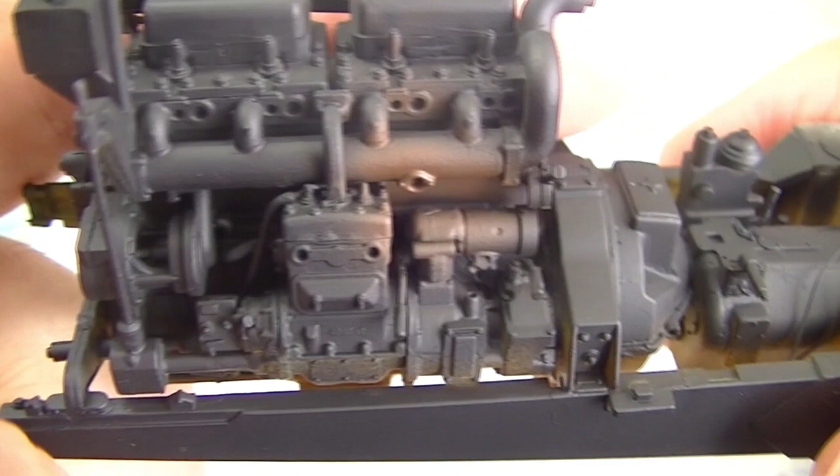So I've done that. I've also added a little bit of wiring. It's tough to see, but if you look down in there underneath the starter, you should be able to see I've got a couple of leads going to the starter motor.

I have also added the ignition conduit. You can see for the pony motor, it's angling down in front of the pony motor cylinder. That's just a piece of lead wire that I shaped there.

And then I also have a couple of spark plug wires coming out of it, but because they're routed around on the back side of the cooling pipe that goes into the top of the pony motor's cylinder head, and kind of underneath the intake manifold there, you can just barely see those ignition wires.

I don't even know how I'm going to get paint on them when it comes time to make them black, but whatever, it is what it is. I'm kind of disappointed at how little they show, but it's one of those things I had to do, so we'll see.

I've got a little bit of rust-colored paint here on the intake manifold because that's where the exhaust from the pony motor runs into it, and I'm going to want to scrub some of the yellow paint off around that. I thought it would be easier to go ahead and put a little bit of the rust on there since I had it out and was doing things with it.

Like spraying the aforementioned exhaust manifold from the pony motor. What I'm going to do is put it on there before I start spraying the rest of the paint on the engine, and I'm going to just use some liquid mask to cover up that rusty part because this is kind of a weird little deal.

This is one casting on the real thing that's got the intake and the exhaust in one chunk. So that part that sticks straight up right there will end up being yellow, while all the rest of it down at the bottom is the exhaust portion and it'll be rusty. Kind of a weird deal, but I think it'll turn out all right.

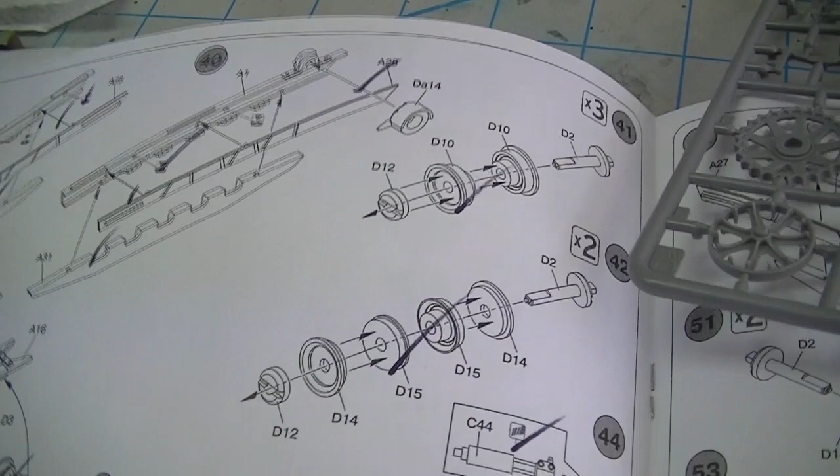And then the next thing you do is assemble all of these roller wheels. Those are kind of a hassle, and they don't really tell you anything other than just put them together. So you're left to assume that you should just glue it all up. That, I think, may be a bad strategy, and I'll explain why here in a second.

Because when you have to combine those trusses from that step and these wheels from that step right here into one structure, that's where the problem starts.

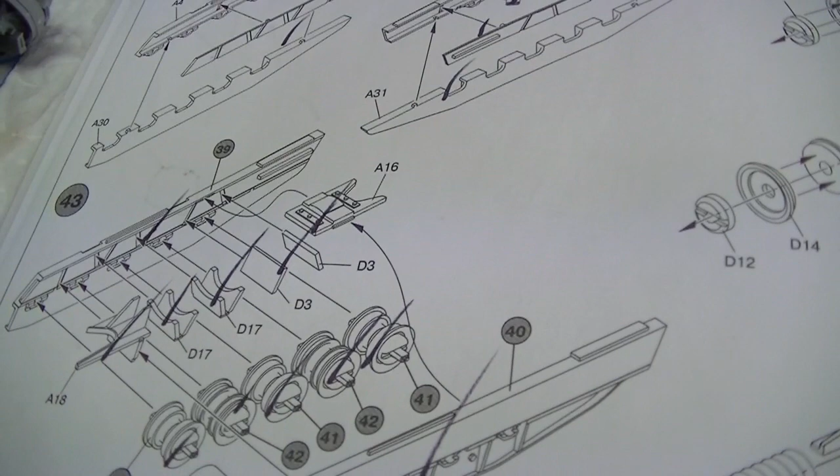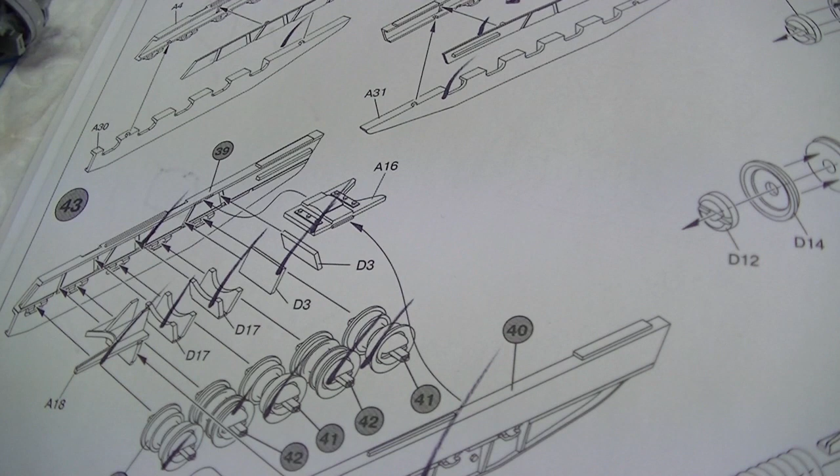Okay, so the first thing they want you to do is take these cross members and add them to all of these slots that are on one side of the assembly. Now let me show you what those slots actually look like.

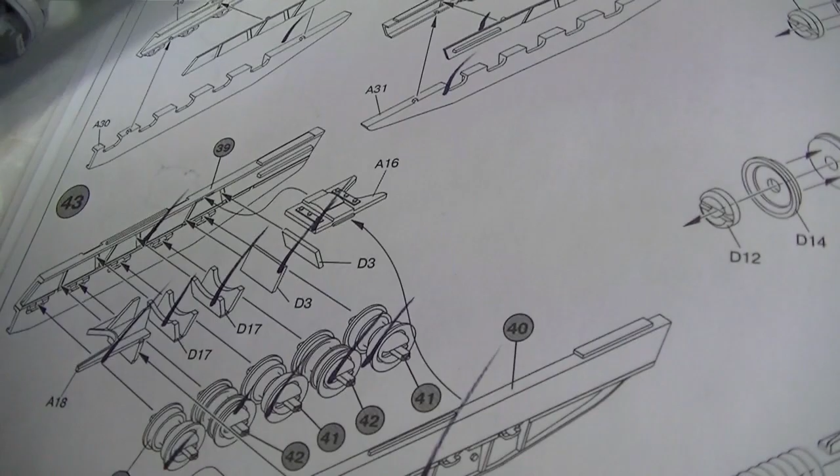If I can find them here on the sprue. Okay, here's a good example. Hopefully I can get the camera to focus right there. Oh, wrong piece, sorry, there they are. Okay, those are the slots, and you can see that they are pretty shallow.

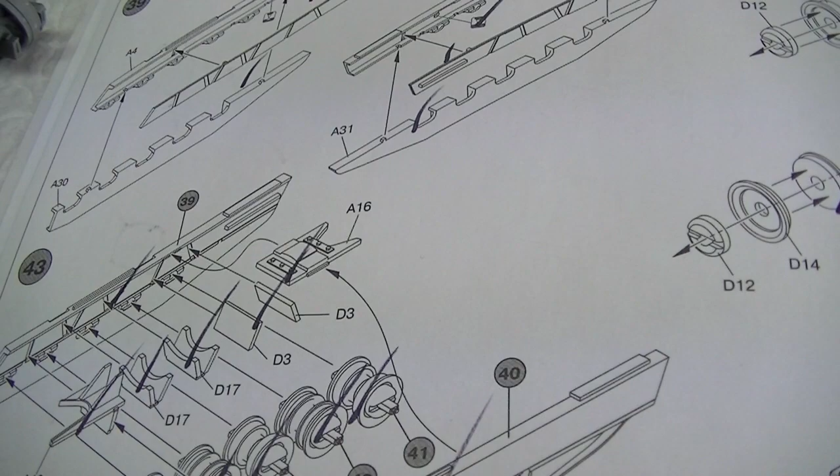Now, if you look closely, you'll see that right here you've got to assemble 3 pieces into a kind of 3-sided box section that mates with these 2 slots over here. These are already built for you, and you're supposed to be able to just glue them in, and they go in pretty effectively.

This is bad engineering. The location features you get here, these little slots, are really not very deep, as you'll find when you go to try and assemble this, especially when you start trying to build this little chunk right here. There's nothing there that really supports those and holds them in the correct alignment.

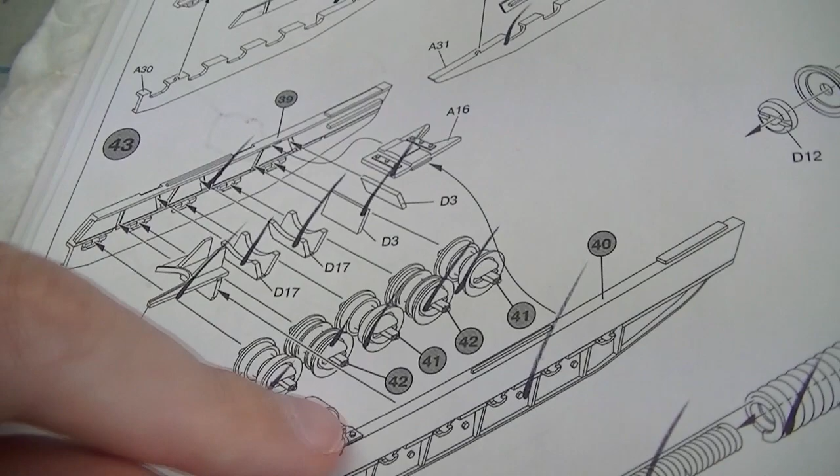And that becomes a problem when you try to join with the other side, because, as you've probably already surmised, there are equivalent slots over here that these are supposed to match up with. Getting everything lined up between the left and the right is dependent on how well you do that.

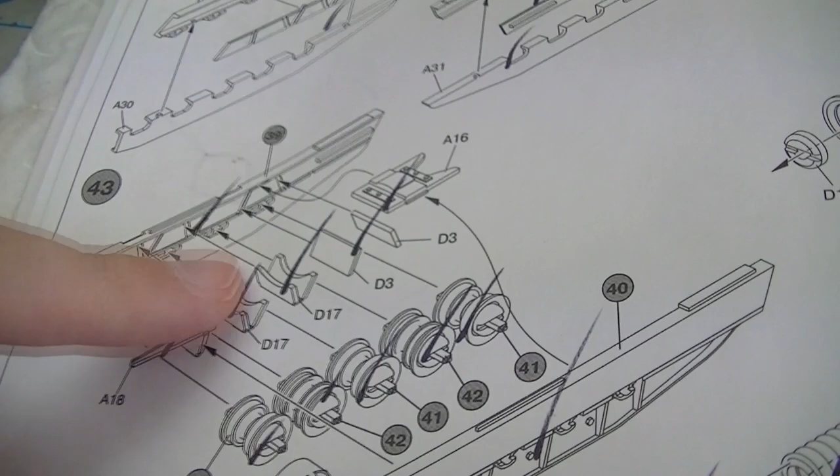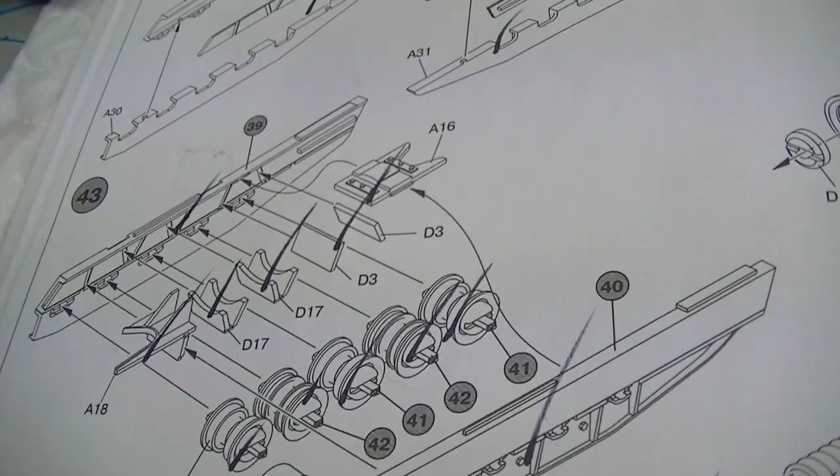Now, here's another thing where it gets really kind of silly. If you look at all these rollers, you can see that they go into these little holes right here. And what you can't really tell from the illustration is that those holes have a flat side on them. Let me show you with the actual part.

Okay, hopefully you can see that and it'll focus. There we go. So you can see that the top side of each of those carriers is flat.

And what's supposed to happen is that they mate with the flats that are molded onto the ends of each one of these axles that these little wheels rotate on. And there's one on each end of those.

Now, that in and of itself is not such a bad thing. I don't really understand why they have to be that way, but it's not a big deal, except that they've compounded the problem by giving you this.

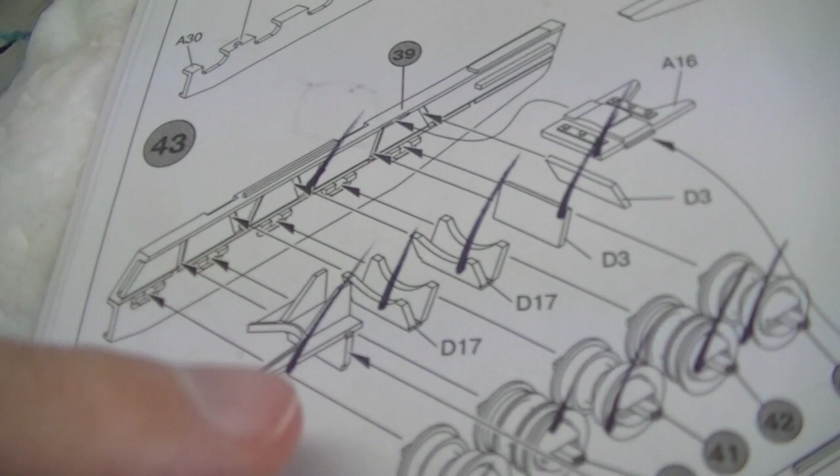See right there? There's a slot in the end of that round part. And what you can't really tell from the instructions is that that slot is supposed to mate with these protrusions on either side of the hole in the carrier.

Let me see again if I can show you on the actual part. This is the opposite side of it from what we were looking at a second ago. Come on, focus up there. There we go, that gets it to focus.

Now you can see those slots - I'm sorry, those protrusions right there on either side of the hole for the axle.

So what happens is, let me see if I can find... yeah, here we go. Let me grab some tweezers so you can see this. Okay, so take a look at that part.

That is one of the shaft pieces for the roller wheels. And you can see that it's got that slot molded into the end of it. It's got that round part molded onto the end of it with that little slot. And that slot lines up with the flat that's on the opposite end of it,

which you can see better in this picture. There's the flat, and the slot is over here on this piece that's molded in, and they're parallel to each other. Well, if the fit were real precise between this round part and this flat, you wouldn't have a problem,

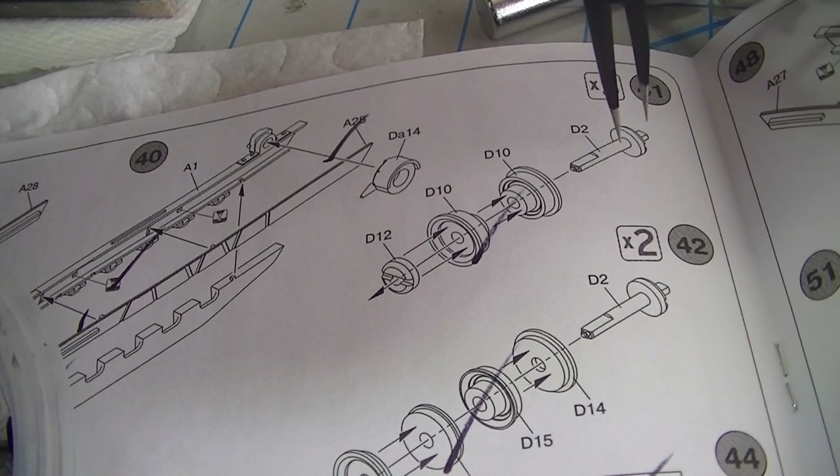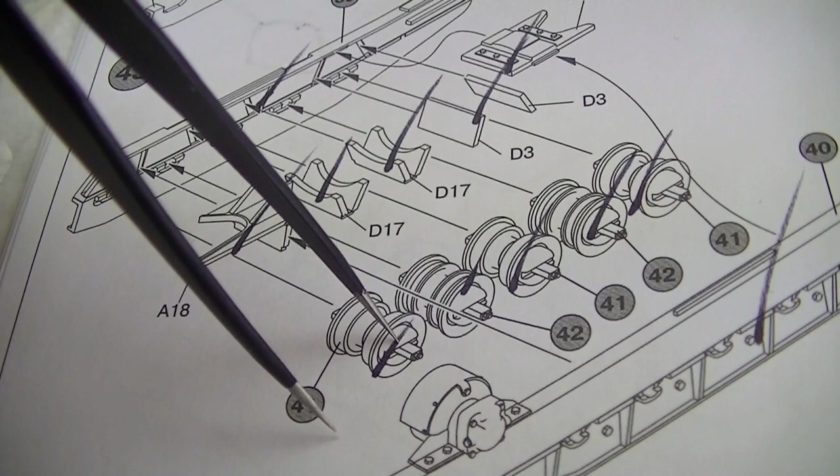because this slot would be parallel to this slot and parallel to the flat, which would then mean that when you insert the roller wheel axle into the carrier over here on this piece, that the notch in the little round thing right here would automatically line up with the protrusions on either side of the carrier hole. Hopefully that all makes sense.

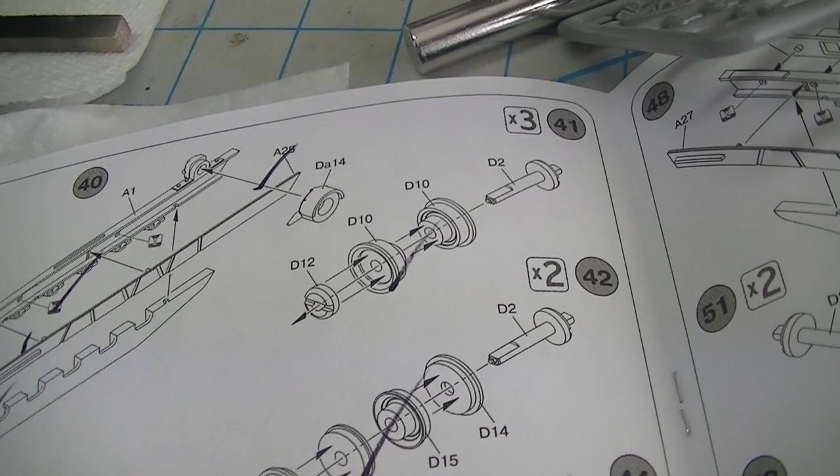The problem is that it doesn't make sense in actual practice because there is quite a bit of slop between the hole in the middle of this round part and this axle. So getting this piece and this piece to be parallel just doesn't happen,

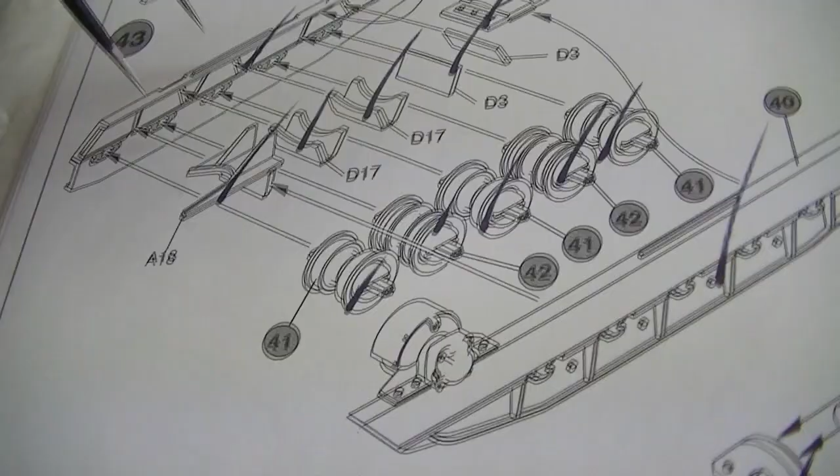which means that when you try to get the notch on either end of the axle to be parallel with both, to fit with both of the protrusions over here and over here, it doesn't happen, which means that these two sides of the assembly don't go all the way together, which means that you get even less engagement between the notches on this truss and these little box section structures here.

So I didn't find all that out until I was well into the process, and I ended up having to do some serious finagling to get it all to happen, and I did, so no harm, no foul.

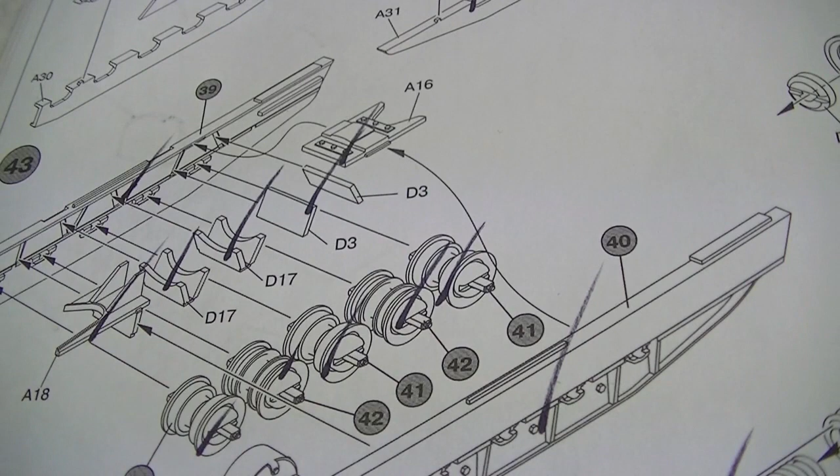But what I think I'm going to do next time on the other side is, instead of putting it all together and gluing it up the way that they suggest here in the instructions, what I'm going to do is take this shaft and bring it over to this piece, and glue it into this carrier the way that it's supposed to be.

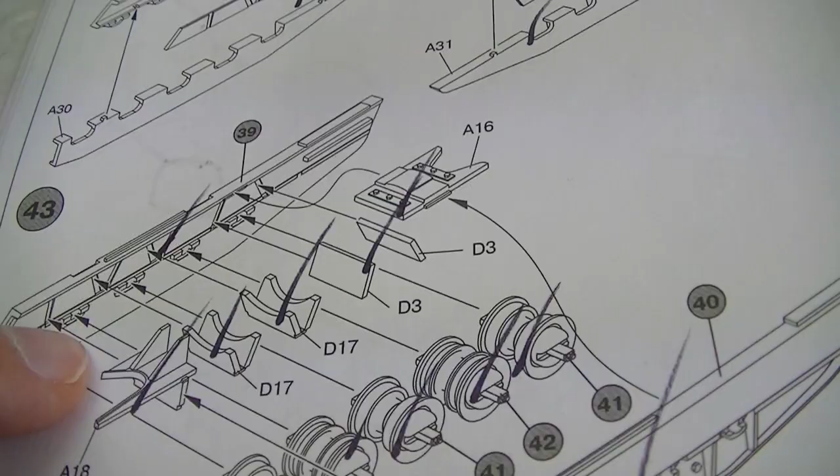Then I'm going to just lay that on the bench so that the shafts are sticking straight up, and I'm going to just add all of these wheels onto each one of the shafts with no glue, and then finish off with this piece, again with no glue.

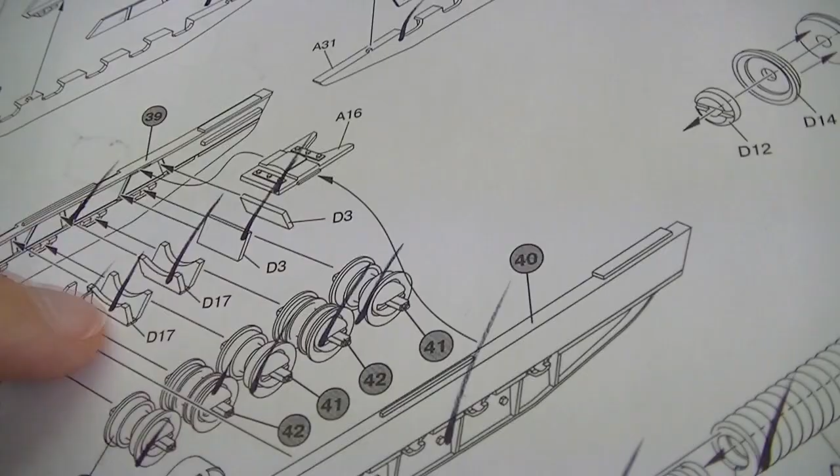Then, because I'll already have these box sections added to this truss, I'll just bring the other truss over and assemble it, and all of this stuff will be basically able to wiggle around because there won't be any glue on any of it.

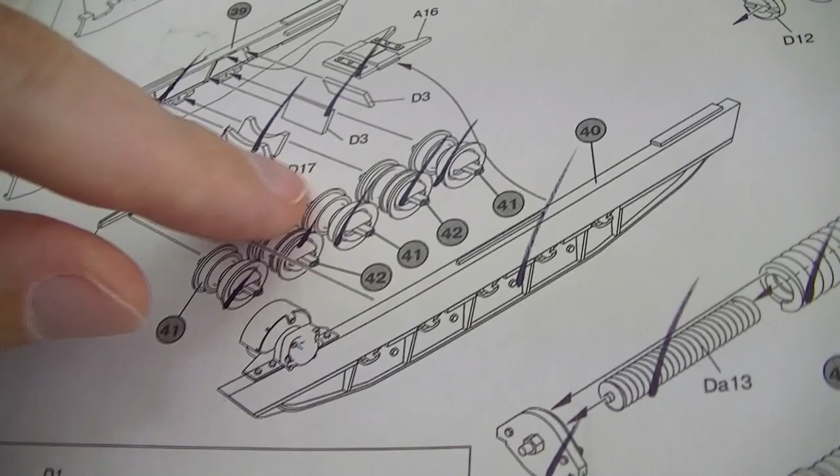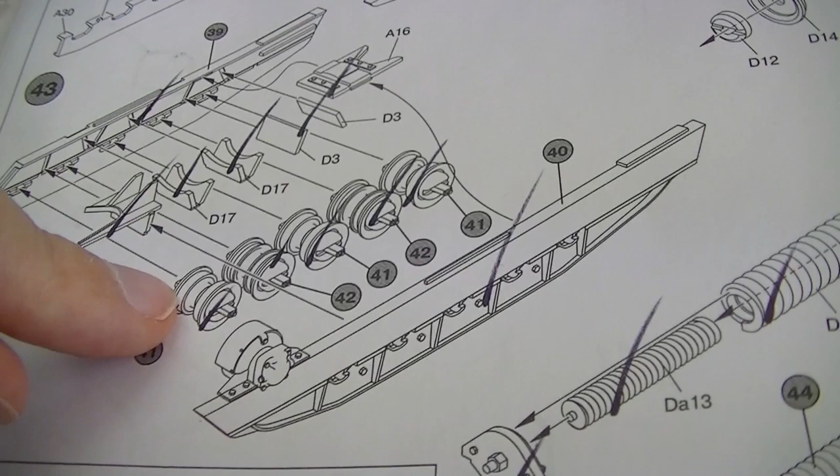And once I've got the two sides of this assembly glued together with these box sections, then if I feel like I need to, I can come back and add some glue to make sure that all of these halves of all of these rollers are correctly lined up, even though the truth is ain't nobody gonna see any of them,

because look, this is the way that the thing sits in real life, and those rollers are clear under here under the bottom. So even if they're a little bit ugly, as long as the track fits in there correctly, it's really not a huge penalty, especially if you've got a bunch of mud and stuff wadded up in there.

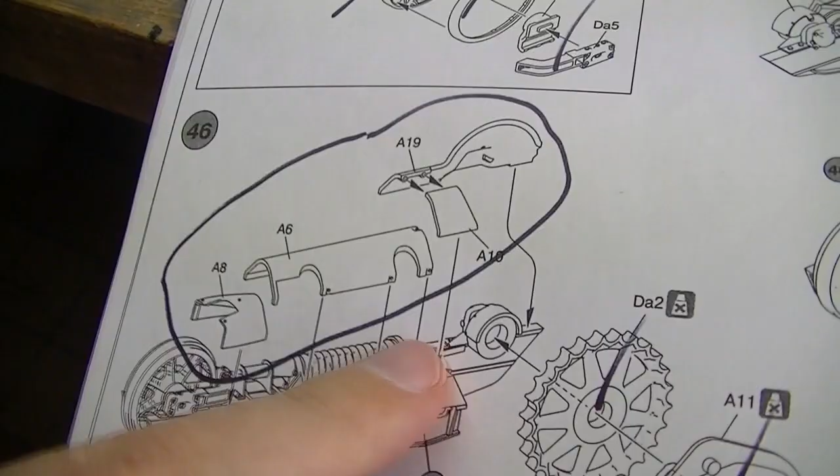As far as the top goes, you definitely won't see any of that, and that's why I've got the top part already primed. If you look at this step, you've got a cover that's going to go over all of that, so none of it will be visible. So not a huge penalty if it's not perfect.

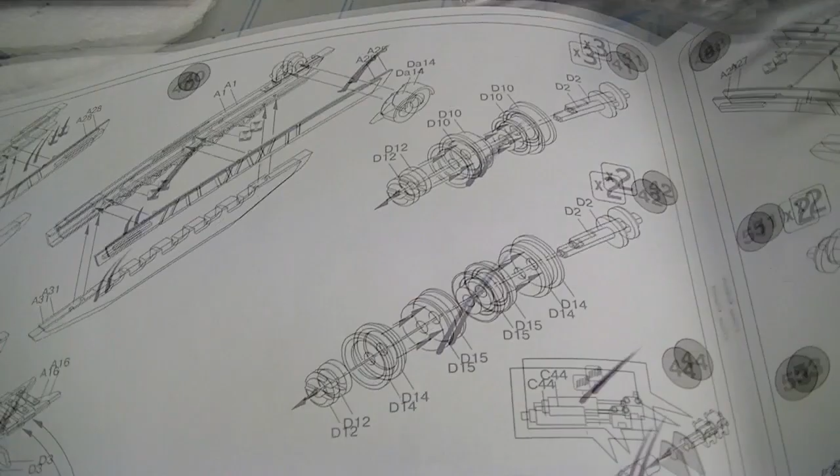I feel like I just rambled through that, and I hope it was coherent so you can see what the issue is. This is just one of those things where somebody like Tamiya would have done a far better job. I understand the challenges, but for something like this to go together the way they want, it really has to be precisely engineered. I don't think making it a sloppy fit was necessarily the best way to go, because instead of making it easier, it actually ends up making it harder.

Now here's another fun thing. If you look right here, what they tell you to do with part C44 is cut it in two and then assemble these two pieces of photo etch to it. That's again just silly engineering. This should be two separate pieces so that one inserts into the other and you add the photo etch, because cutting it perfectly straight is a huge hassle. It's a tiny little part, and getting it to line up correctly where you add it to the top part of this structure is very difficult to get perfect. Doesn't make a huge difference in the long run because it's going to be covered up, but it's definitely something to look out for.

Something else I've been warned about is to make sure the tracks fit properly on these top roller wheels. So what I'm going to do is not add them until after I've got this structure complete and have a full set of tracks I can lay on there to make sure they're lined up correctly.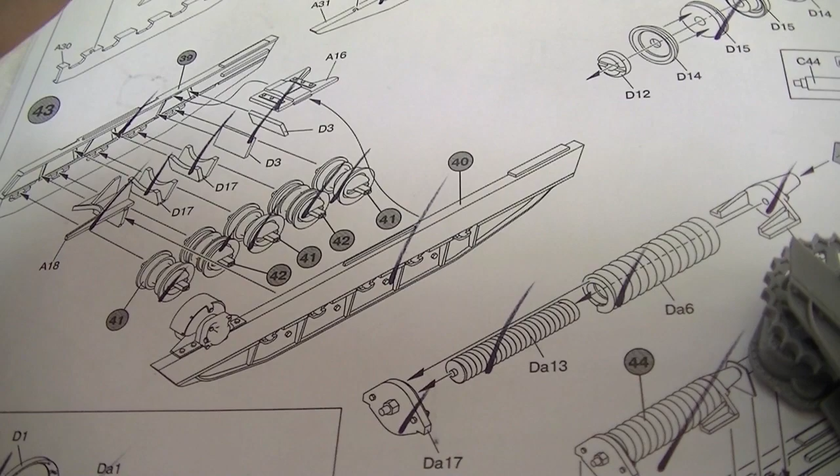Here's something I forgot to mention, about this part of the assembly where you're taking this roller wheel and its fork and sliding it into the end of this assembly. This is where not having everything perfectly aligned can come back to haunt you. This subassembly slides into the end of this other section and mates with a couple of protrusions on the insides of these trusses. You can kind of see in there where they do that. It's almost... let's see if you can see it on the actual parts.

Well, you just have to take my word for it that that's what happens. Anyway, it slides in from the end here, and you push it all the way in until the end of the fork lines up with the end of this spring tension adjuster right here. So you've got a couple of things that have to come together and line up properly, and you can see why you'd want the two pieces of that adjuster to be perfectly lined up, because everything has to meet at this point.

When you have to cut it apart and then glue it back together around this little bit of photo etch, that can be a little bit sketchy. You can see I don't have it glued back together perfectly, but I did all of this with the parts a little bit soft because that was the only way to get everything positioned correctly, and that's just how it ended up.

Now what you can't see is that because the two halves of this truss assembly were not perfectly lined up, this wheel was sitting in there cockeyed. It was angled—come on camera, focus up there—it was angled clockwise just a little bit, and you can just barely see it underneath here.

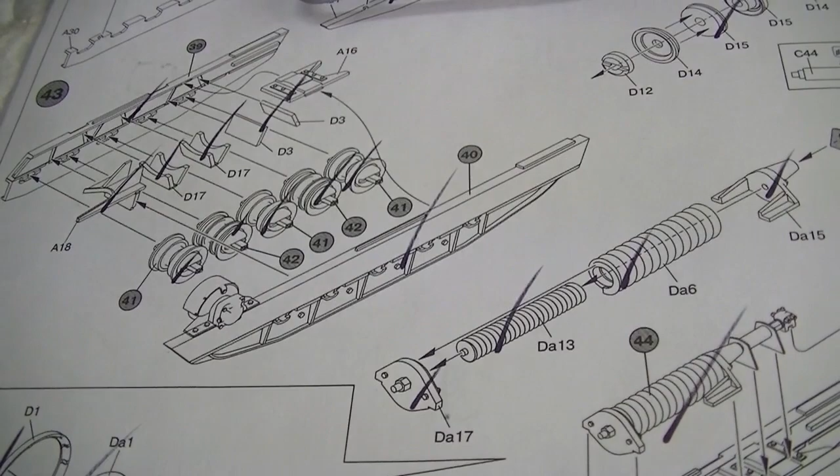I had to go in there with my knife, reach in with the knife point, and slice off the protrusion that this piece rests against so I could push the top of the wheel over counterclockwise, and I put a 20-thousandths shim of styrene under there. You can just barely see that little white piece peeking out. That got the wheel straight and true with the world. Problem solved, but that's how bad engineering and poor fit can cascade several steps down the instruction sheet and end up causing you a world of hurt.

Okay, speaking of the tracks, let's take a look at those and talk about the process I've come up with for assembling them. But before we do that, let's just look at the parts themselves and the instructions.

As you can see, you've got a sprue, and you've got 8 of these sprues. I was curious, so I did the math. There's 110 gates to clip on each of these 8 sprues. So you better have a good set of sharp clippers. I use my Xurons, they work really well.

I will say that how well you do at clipping these off will have an effect on your success, in particular when you look at these 2 gates on the top of this link plate. You want to make sure you get those very flush, and the reason why will become clear in a second. But before I go on, let me advise you of something that will definitely trip you up, and is much easier to fix while these link plates are on the sprues.

Take a look at that one right there. That's a good example. Look at the hole on the right-hand side. You should be able to see there's a little bit of micro flash on the inside diameter of that hole. This one is the same, but maybe not quite as bad. Now look at the same part over here. See how much larger the ID of that right-hand side hole is? That's what it's supposed to look like. And this is what it looks like on about half of the parts.